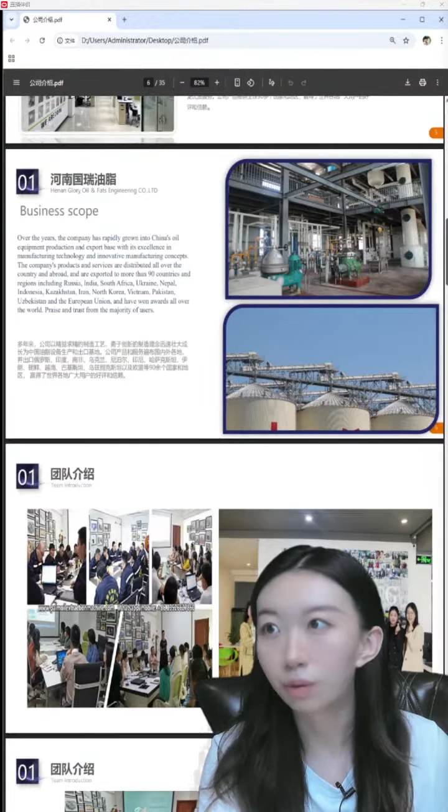Such as extracting edible oil single machine production line, and all process equipment we can provide for you. This is our company office. Our company is located in Henan Province, Central China, and our company has its own factory and its own engineer team. This is our office, and this picture is our previous fully continuous refining process workshop. Our equipment was exported to more than 90 countries and regions.

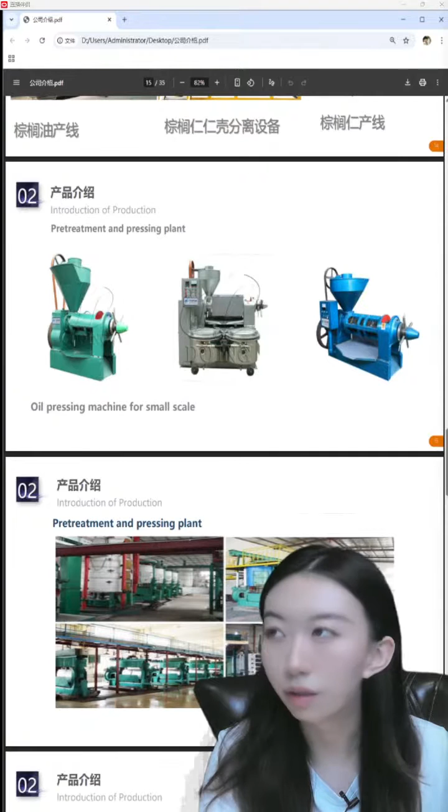The next is the palm kernel oil production line and the palm kernel and shell separator machine. The next is the common oil seeds presser. We have 3 kinds of presser for you, and we can help you choose according to your need, according to your capacity.

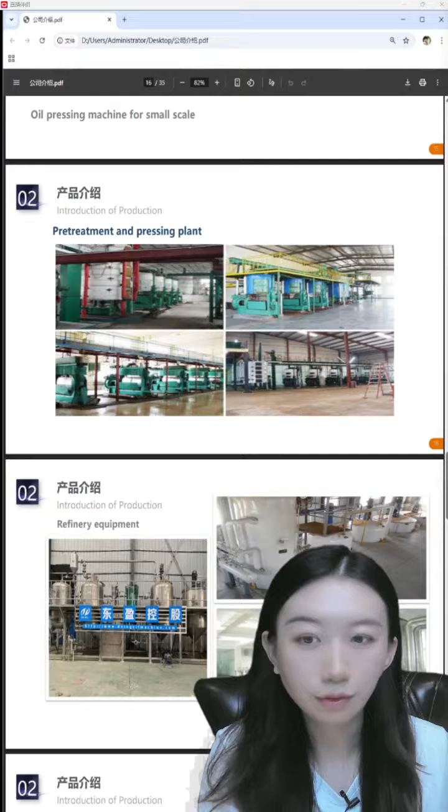Our company has its own factory, its own engineer team, and we can support customization for you. Our engineer can design the production line, the machine plan for you according to your need. This picture is a pre-treatment and pressing workshop. This picture is our previous project.

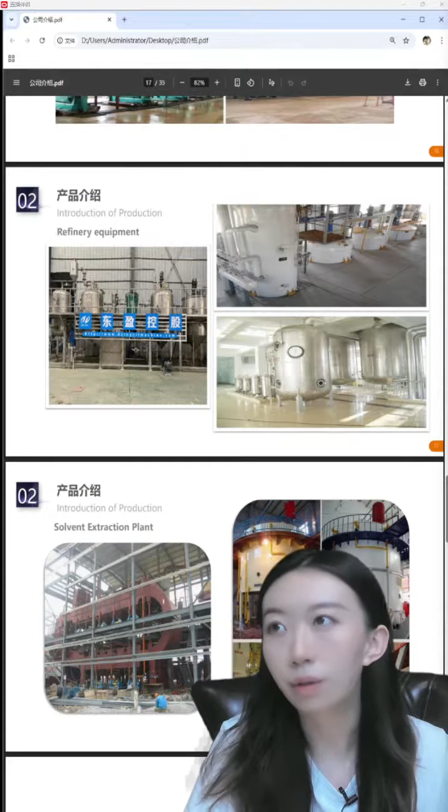The next part is the refinery equipment. We also have 3 kinds of refinery equipment, such as batch type refining production line. This picture is a batch type, and if you want a larger capacity, we also have a semi-continuous refining production line and fully continuous refining production line. It has different capacity, and the higher degree of automation.

The next is a solvent extraction plant. This is a single machine. And besides the single machine, if you need a production line, we can also provide it for you. So guys, if you want to invest in an edible oil production line, or if you want a single machine, all of this equipment you can enter our live show, and our company can provide it for you.

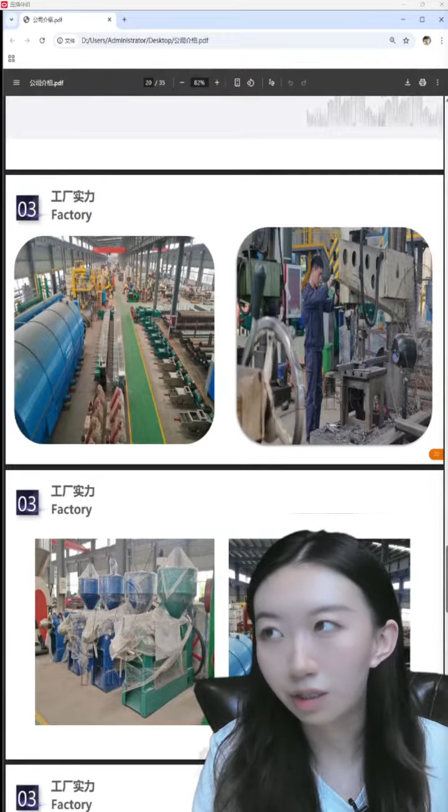This part, next picture is our factory. Our factory covers an area of 40,000 square meters.

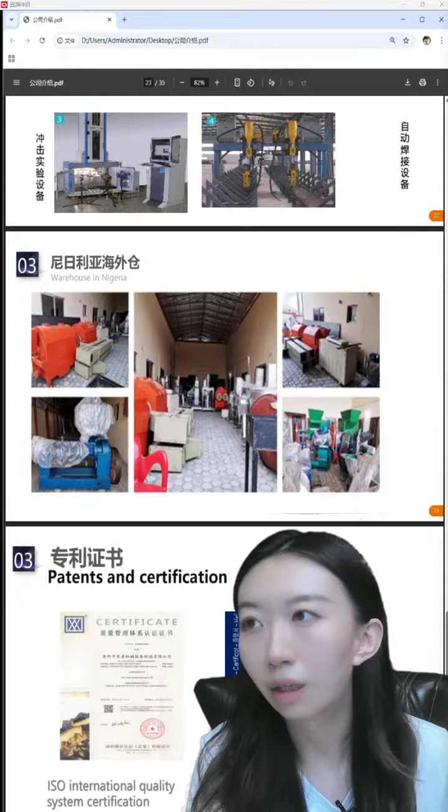And our company also has an overseas warehouse in Nigeria. This is our warehouse, and our company has a subsidiary in Nigeria. So if you are interested in our previous project in Nigeria, in Africa, we can arrange the right sales manager for you to lead you to visit and communicate about our previous project.

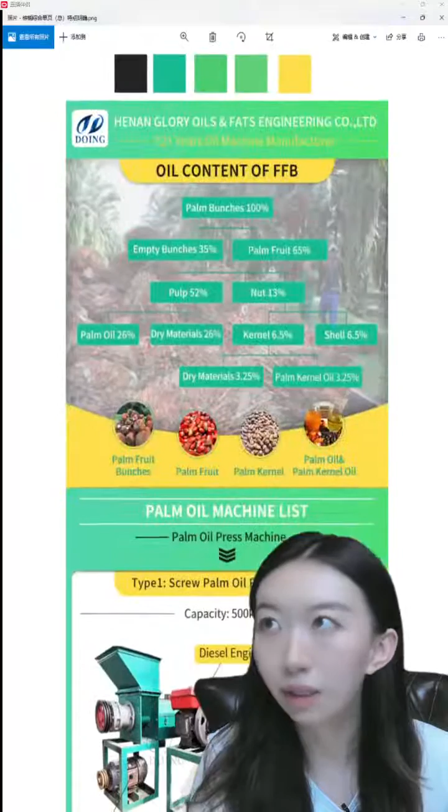Today our topic is to introduce automation and high-yield modern palm oil production equipment for you. So next, let me show you the equipment, let me see the picture.

In palm oil machines, the most important is the presser, and our company has 2 kinds of palm oil presser. The first kind is a single screw palm oil presser. Look at this, and this presser has 2 power systems: diesel engine and electric system. You can choose the suitable system for you, and our sales manager can help you choose according to your need.

The single screw palm oil presser capacity is 500 kg per hour. It is suitable for home use and small investors, palm oil production business starters, because its capacity is smaller.

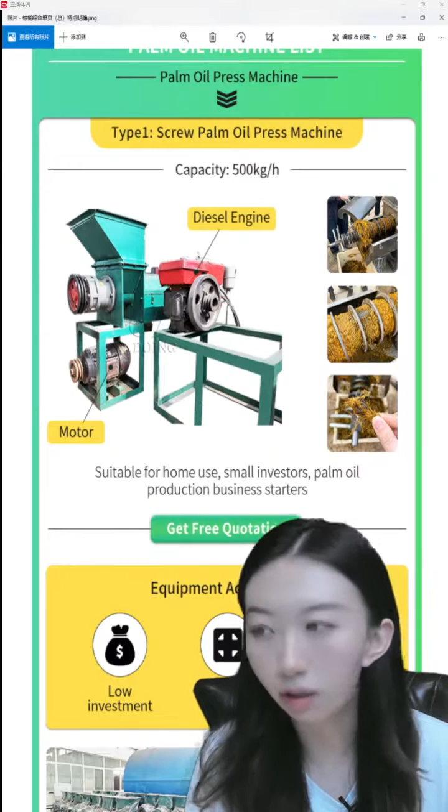And if you want to adjust the internal pressure, it needs a worker. So this equipment is semi-automation equipment. But this equipment is cheaper than the next one. The single screw palm oil presser's advantage is low investment, it's cheap, it covers a small area, and it is easy to operate.

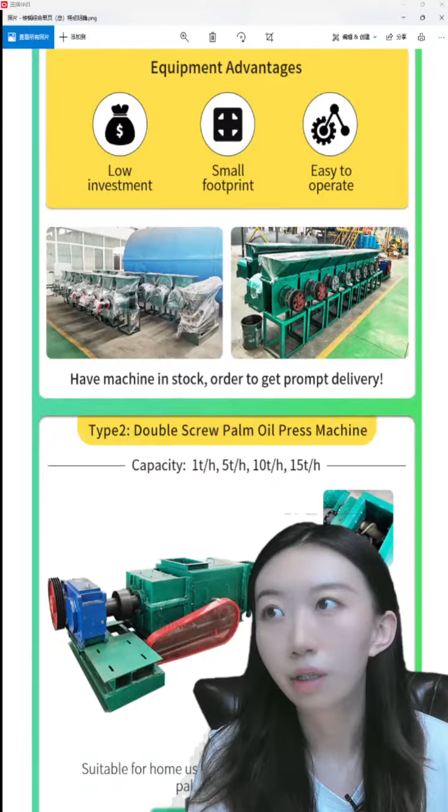It's a simple equipment. And next is the other one: the double screw palm oil presser. This presser has 2 screws, and its residual oil rate is lower than the first.

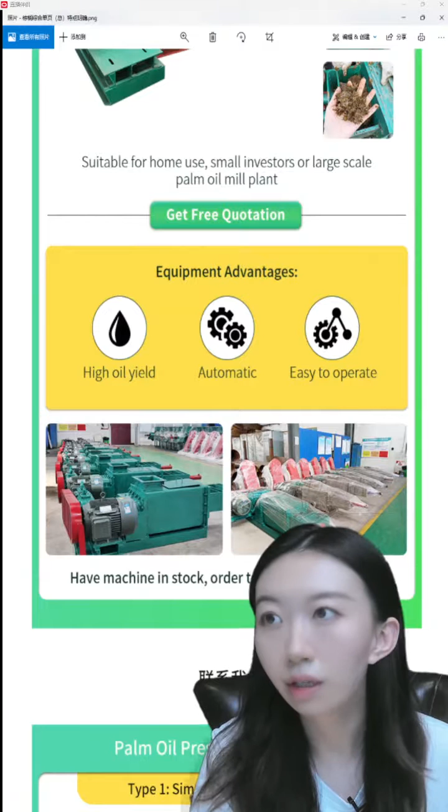Its capacity is more than 1 ton per hour. And this double screw presser is also suitable for production lines. Its capacity is larger, and the internal pressure doesn't need a worker, because this equipment's internal pressure is controlled by a hydraulic pump station and the reducer at the tail. So it's automated, doesn't need a worker. It can decrease labor cost, and it can give you high oil yield, high degree of automation, and it's also easy to operate.

Okay. In the past, I introduced the 2 kinds of presser for you. And guys, if you want a single machine, or if you want a palm oil presser, we can provide it for you. And these 2 kinds of presser, we have machines in stock, and we can arrange prompt delivery for you. We can quickly transport it for you.

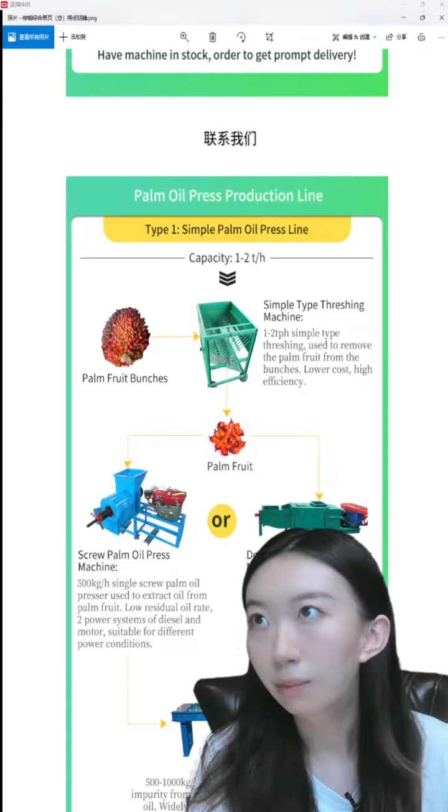Welcome. In the past, I introduced the single machines. Thank you. The single machines are the single screw palm oil presser, and the next one is the double screw palm oil presser. They are palm oil pressers for you. If you want a single machine, we can provide it for you.

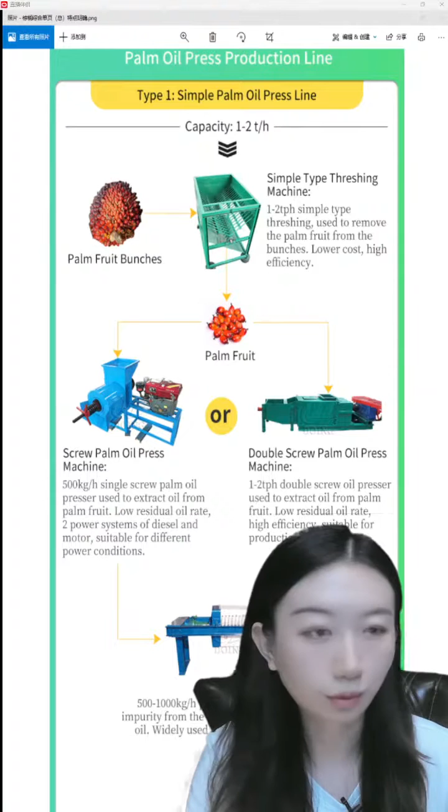After threshing, you can get the empty palm fruit bunches and the palm fruit. Then the palm fruit can enter the presser.

For the presser, we have two kinds. The first one is the single screw palm oil presser machine. Its capacity is 300 kilogram per hour to 500 kilogram per hour. Its advantage is low investment, and it has two power systems.

You can choose yourself the suitable system, and it is suitable for different needs. It can give you a low residual oil rate. But if you want to adjust the internal pressure of this single screw palm oil presser, you need a worker to adjust it.

But the other one, the double screw palm oil presser, doesn't need a worker. It has a higher degree of automation than the single presser, and the double screw palm oil presser capacity is higher. Its capacity is 1 to 2 tons per hour, and it's suitable for production lines.

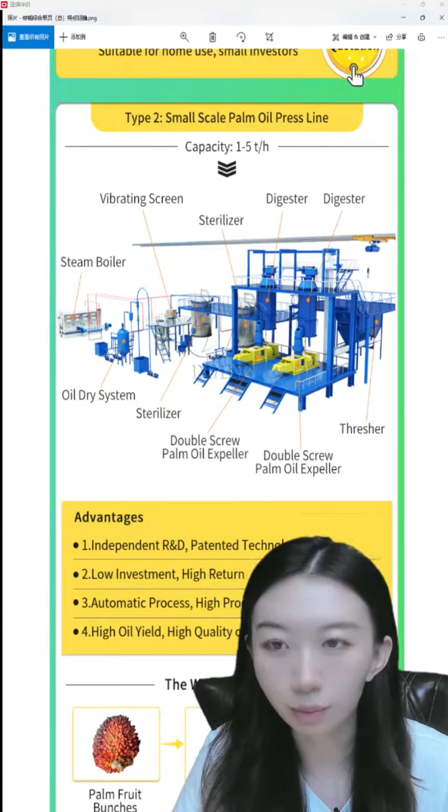This small-scale palm oil presser includes all the process equipment, and this process line has the advantage of lower investment, and it can give you higher returns.

This process line can be designed with fully automatic equipment. The efficiency is higher than the last one. And after this production line, you can get a high oil yield, and high quality crude palm oil.

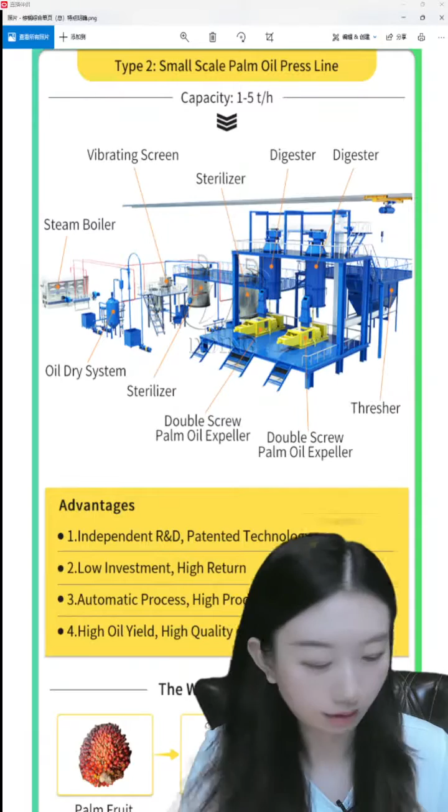The palm oil work process is divided into these steps. The first is sterilization. The FFB will enter the tank to heat and soften the fruit, making it easier to thresh. Next, the palm fruit bunches will enter the thresher to remove the palm fruit.

Next, the palm fruit will enter the digester to destroy the structure of the palm fruit. Next, the palm fruit will enter the presser for extracting the oil from the palm fruit. Then we will get the crude palm oil.

The crude palm oil has many impurities inside, so it needs clarification. This clarification step uses two equipment.

After clarification, the palm oil will enter the filter to remove the small impurities. After this step, you will get the red palm oil, which is the palm crude oil.

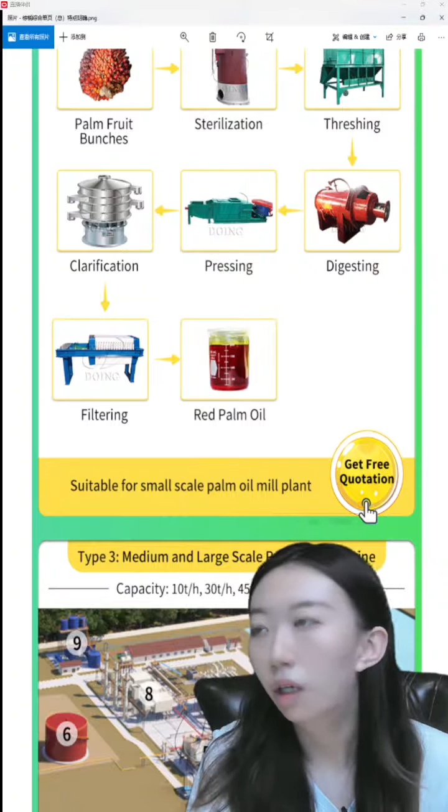And if you want the crude oil to be able to storage for a longer time, you can also equip a vacuum dryer after the filter. It will make the palm crude oil storage time longer.

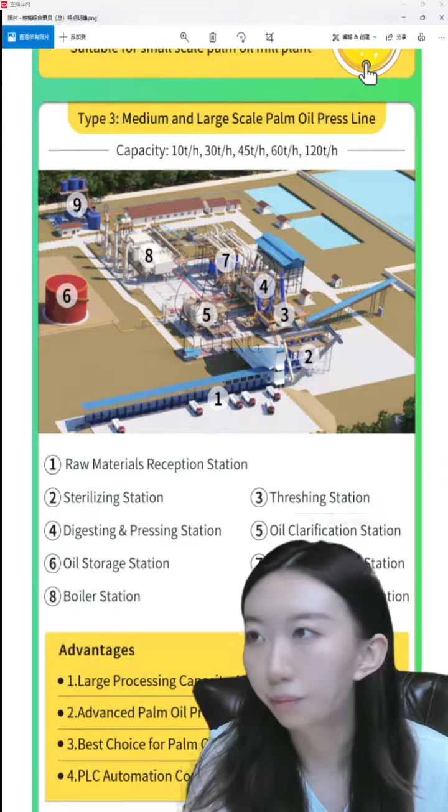In this press line, it will equip more equipment, and it has a higher degree of automation. In the workshop, you don't need workers, because this press line uses the PLC automation control system.

You can control the process by computer, so this equipment will decrease the labor cost for you.

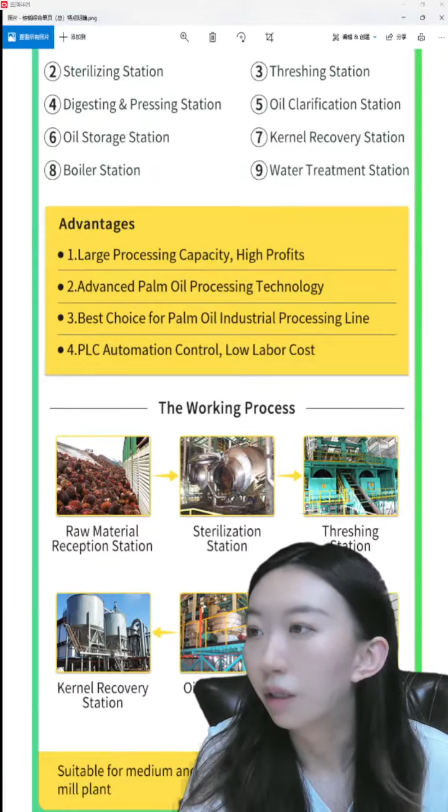This process line has many advantages. It will give you high profits, and it has a large capacity.

After this press line, the crude oil quality is higher than the last press line. The quality and the storage time of the crude oil will be increased.

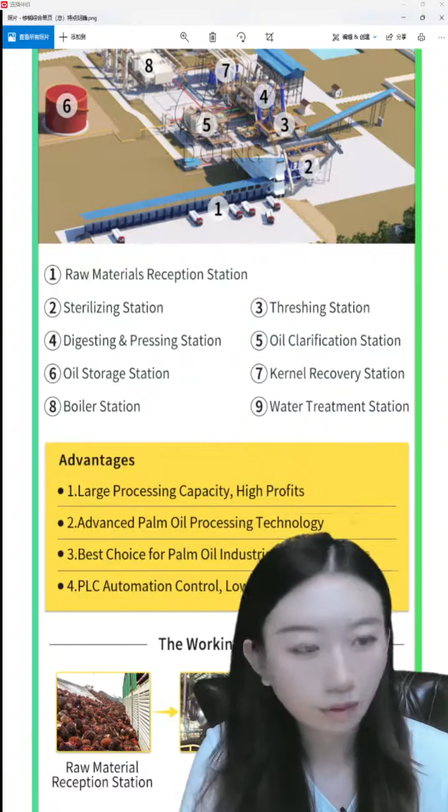This palm oil process line work process is divided into these steps. First, the FFB will park at the raw material reception station, and then the raw material will enter the sterilization station to heat and make the palm fruit soften.

Next, the palm fruit bunches will enter the threshing station to remove the palm fruit. After this step, you will get the palm fruit, and it will enter the digesting and pressing station to destroy the structure of the palm fruit and extract the oil.

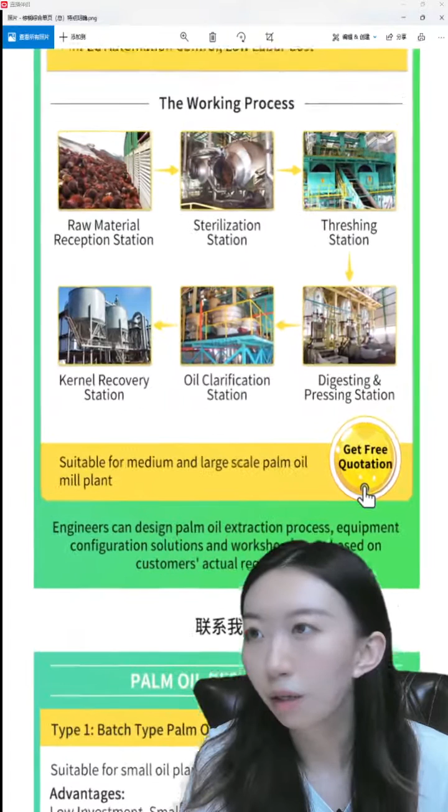Then we will get the crude palm oil, and the crude palm oil will enter the oil clarification station to remove the impurities inside. In the medium and large process line, it will also equip the kernel recovery station.

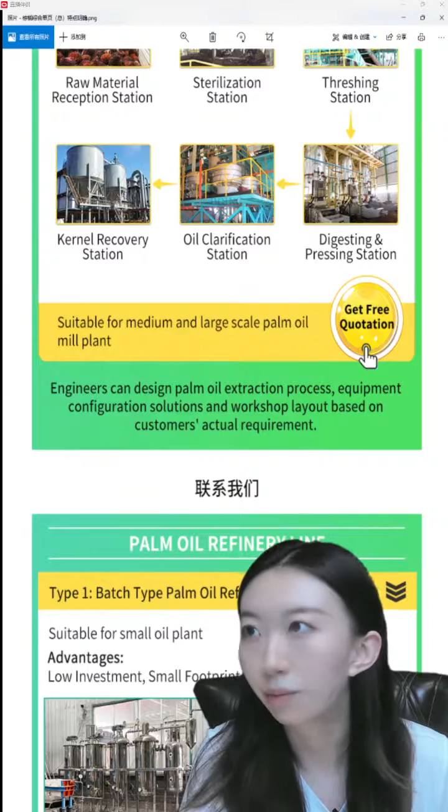And if you want to use the process line more completely, you can also equip a palm kernel process line to produce palm kernel oil, and then you will get more profits. This medium and large palm oil process line is suitable for medium and large scale palm oil mill plants.

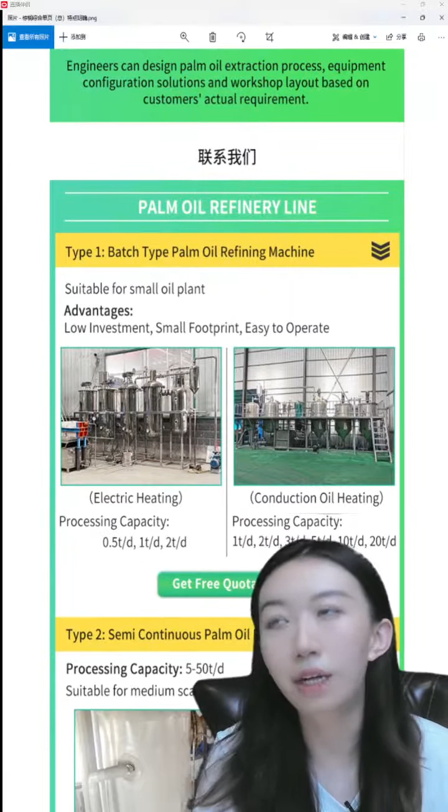Next is the palm oil refining equipment. Let me tell you about it. In this process, we also have three kinds of production lines. The first type is the batch type palm oil refining machine.

This kind of equipment is suitable for small oil plants because its capacity is less than 20 tons per day. This kind of refining machine may have two kinds of heating systems. You can choose according to need.

The first is electric heating. Its capacity is 0.5 tons per day to 2 tons per day. This equipment is cheaper than the other one, but the process cost is higher because it uses electric heating, and it needs higher electric stability. The other one is conduction oil heating.

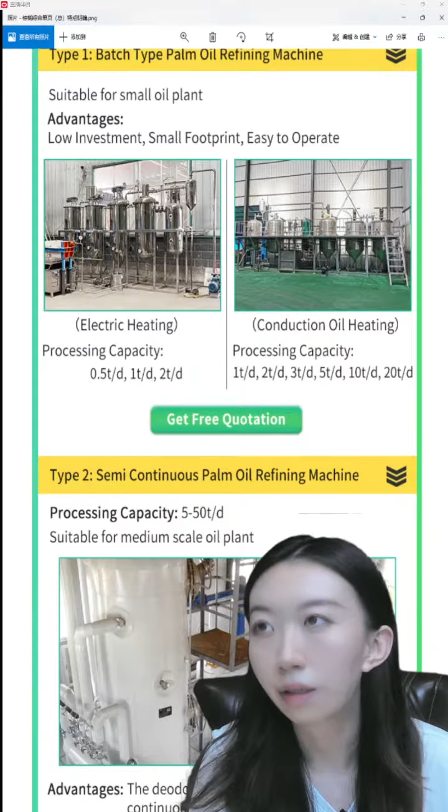Its capacity is larger, 1 ton per day to 20 tons per day. This batch type palm oil refining machine can increase the automation level for you, and this production line doesn't need many workers. Just 3 to 4 members can control this production line.

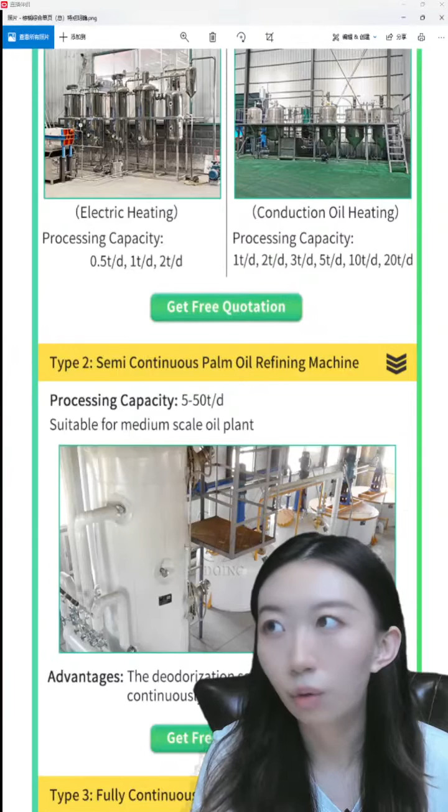Don't worry about it. And if you want to get larger capacity, we can provide the semi-continuous palm oil refining machine for you. The capacity is 5 tons to 50 tons per day, so it is suitable for medium scale oil plants.

Its advantage is it is carried out continuously. Its efficiency is higher, and the quality of refined oil is better, and its automation level is better than the batch type. This picture is our previous project.

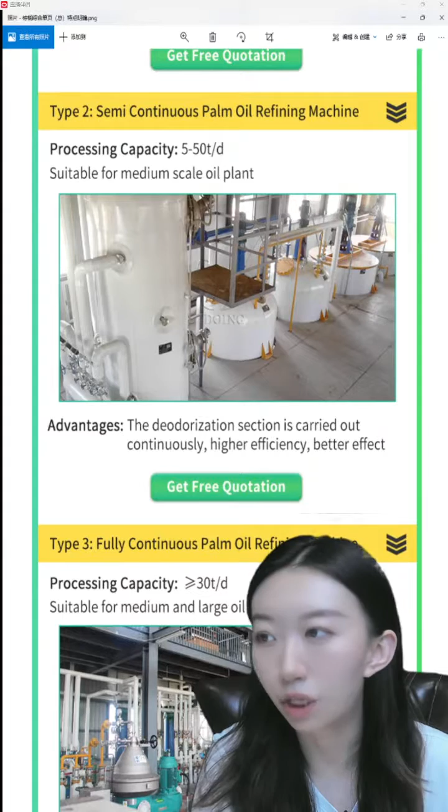Okay, the last refining equipment is the fully continuous palm oil refining machine. Its capacity is the largest, more than 30 tons per day. If you want to invest in a large scale production line, we can provide the fully continuous palm oil refining machine for you. It is suitable for medium and large oil plants.

This fully continuous production line has many advantages because the whole oil refining process is fully continuous. So its automation degree will be increased, and the labor cost will be lower than the other two, and the oil waste will be lower, so it can decrease the residual oil rate.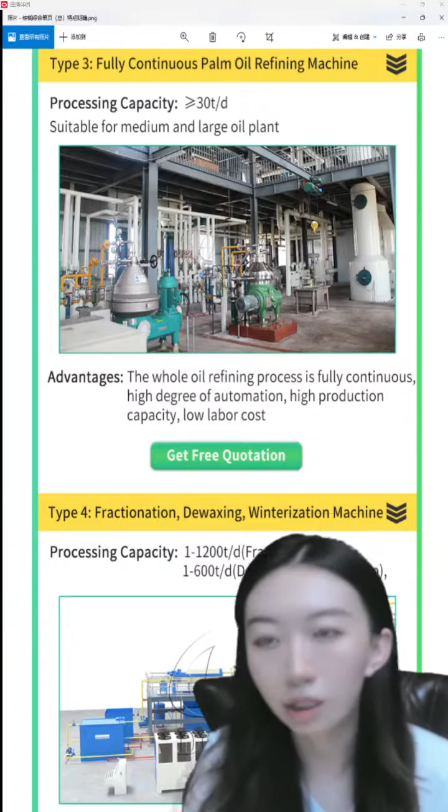Besides the refining equipment and the pressing equipment, we also can provide the fractionation equipment, dewaxing equipment, and winterization equipment for you. The fractionation equipment is suitable for palm oil, palm kernel oil, and coconut oil. The dewaxing machine is suitable for sunflower oil, corn germ oil, rice bran oil, and flaxseed oil. The winterization machine is suitable for cottonseed oil.

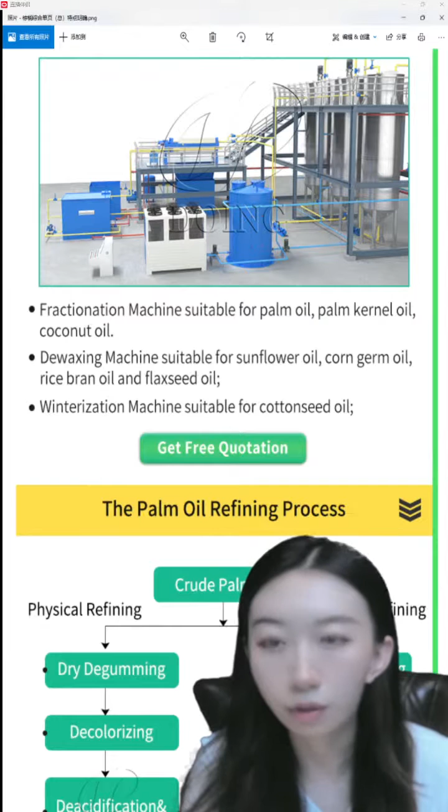This part is the refining process, and different kinds of oil seeds are suitable for different processes, and we can choose the suitable method for you.

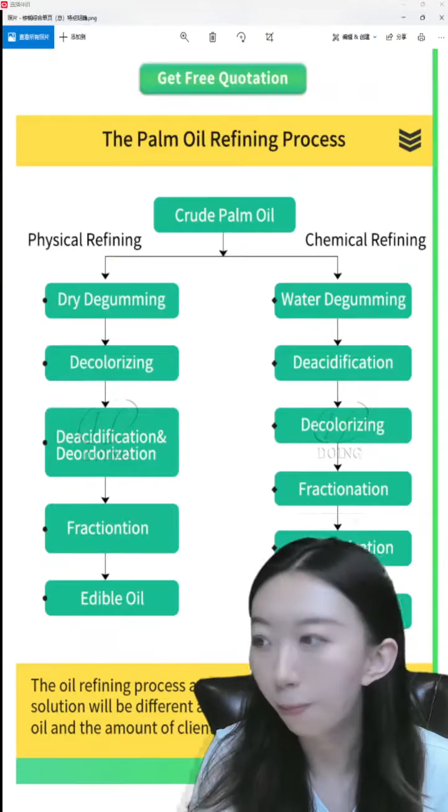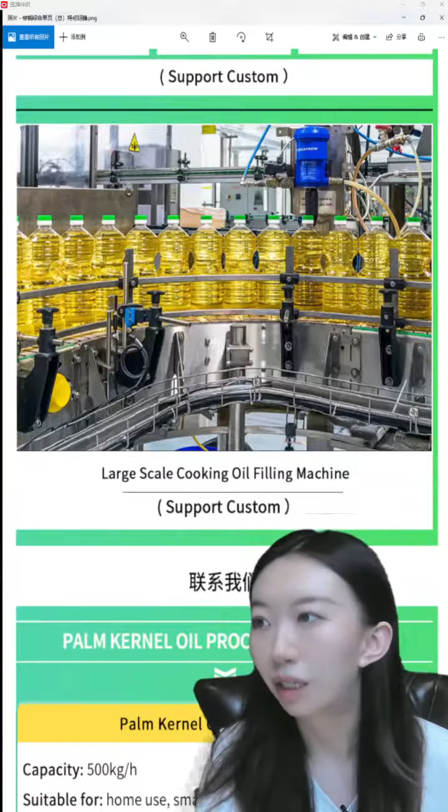Okay, next let us see the 3D video to know the palm oil press line, and I will introduce the palm oil pressing process for you.

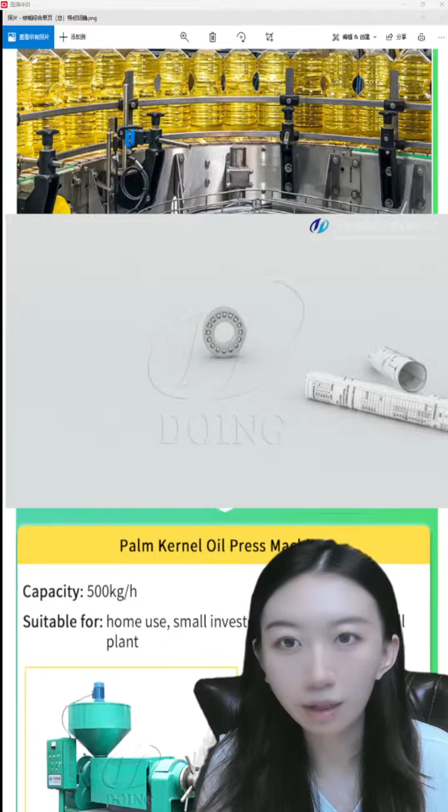Now I'm using this 3D video to show the 1 to 2 ton palm oil press production line. The palm oil press line is divided into several steps: sterilization, threshing, digesting, pressing, and clarification, and vacuum drying.

These steps constitute the palm oil production line.

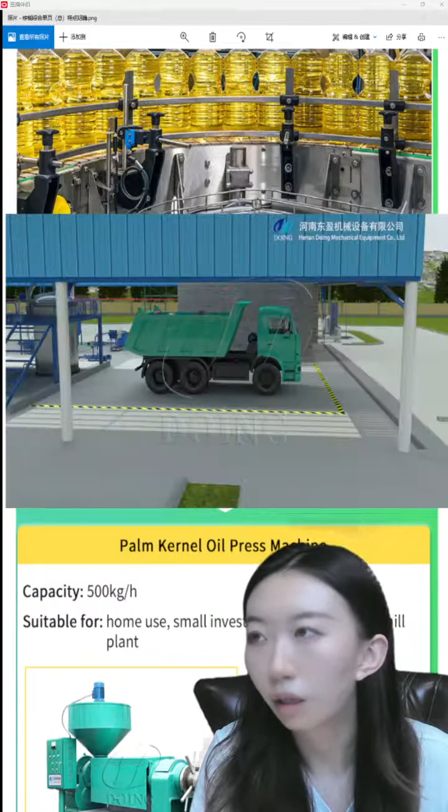And the first step, the truck will unload the FFB on the ground, and then the worker loads the FFB into the fruit cage.

In this production line, we also equip a crane. The crane lifts the fruit cage and puts it into the sterilizer. This is the fruit cage, and 4 fruit cages can be put in each sterilizer.

And the door of the sterilizer is a hydraulic door, opening and closing to meet the worker's needs.

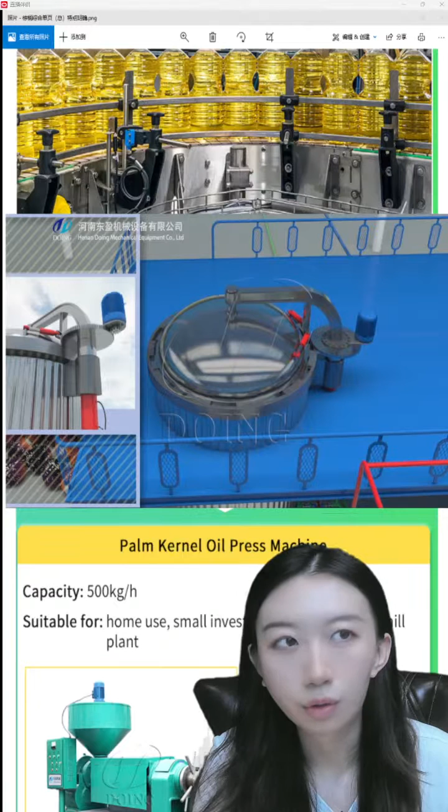And then the FFB will stay inside for heating. It will heat for 1 hour to 90 minutes.

And this room is a boiler room. This boiler is a biomass boiler. It burns empty palm fruit bunches, or branches, or firewoods.

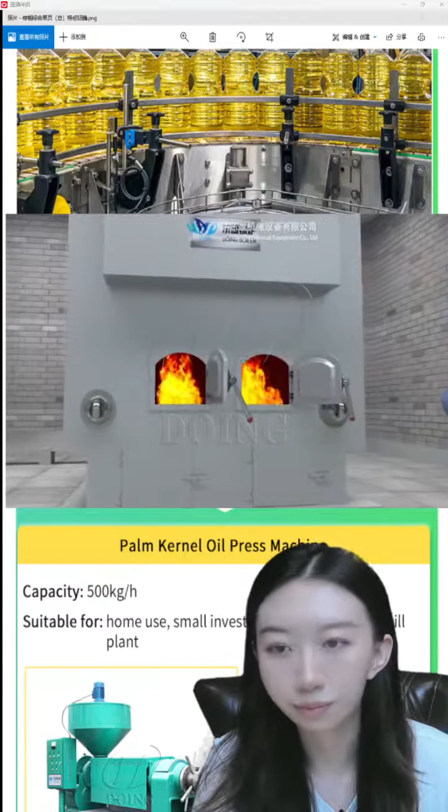And after boiling, the steam will enter the steam drum and then lead to different step equipment. Because palm oil solidifies easily, every step of equipment has a heating coil.

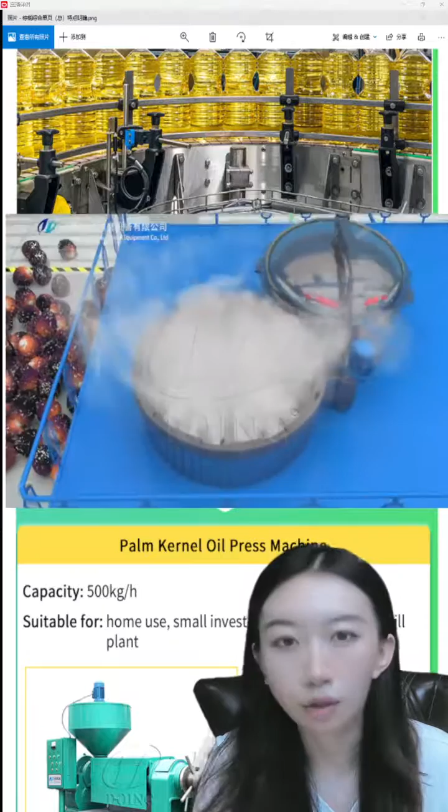And after sterilization, the palm fruit on the palm fruit bunches will be softened and easier to remove the fruit from.

So then the crane lifts the fruit cage and puts it on the shelf. Then the palm fruit bunches will enter the thresher.

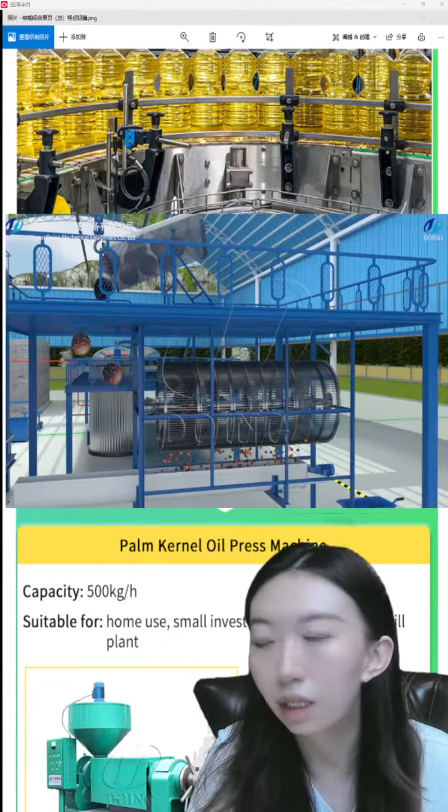This thresher is a drum type palm thresher. It is 2.5 meters long. Because it is long, the palm fruit bunches can stay inside for a long time, and the palm fruit can be removed clearly.

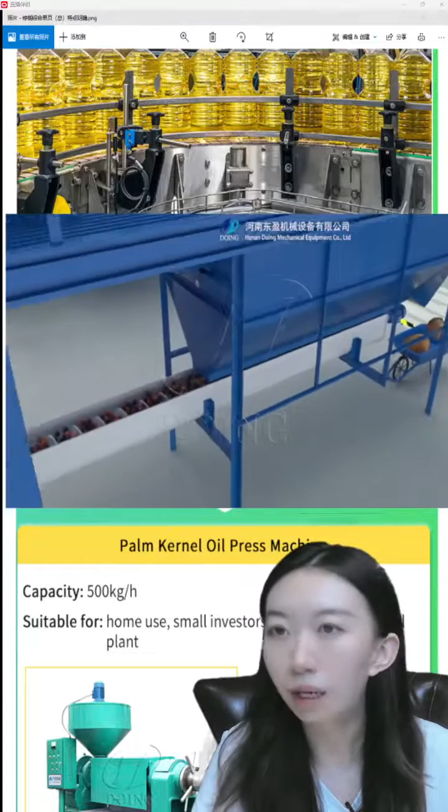And after threshing, the palm fruit will fall down to the screw for the next stage, and the empty palm fruit bunches will fall out from the other side. We prepare a trolley to collect it, and the empty palm fruit bunches can be the fuel for the boiler.

The next stage is digesting. Then the palm fruit will enter the digester through the screw conveyor. This digester is a vertical digester.

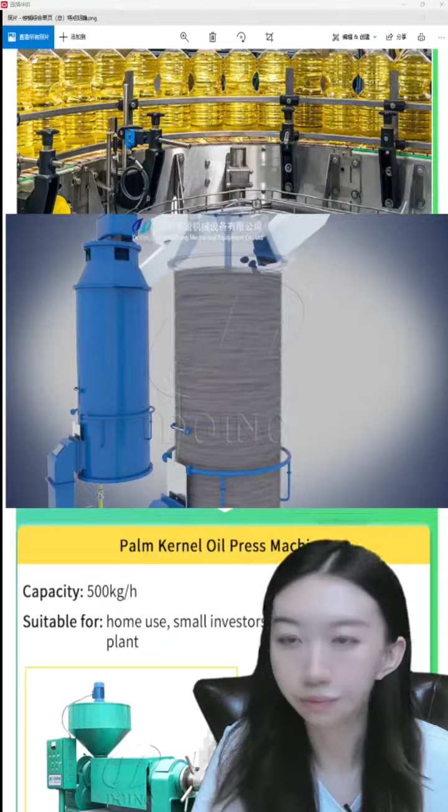And there are many stirring knives. The fruit inside will have its structure destroyed.

And during digesting, some palm crude oil will flow out, and our engineer designed an oil collecting tank in the pipe below.

Next stage is pressing. The palm fruit will enter the double screw palm oil presser directly. In the video, we use a double screw palm oil presser because its residual oil content is lower and its efficiency is higher.

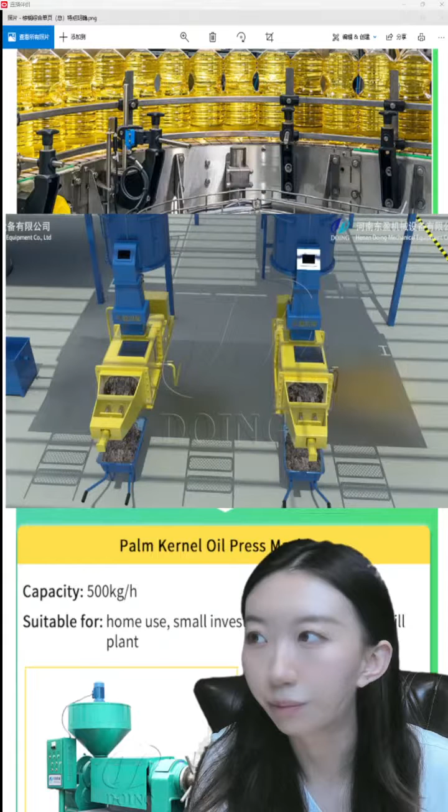There are two screws. The two screws move relative to each other, and the oil will be discharged by beating.

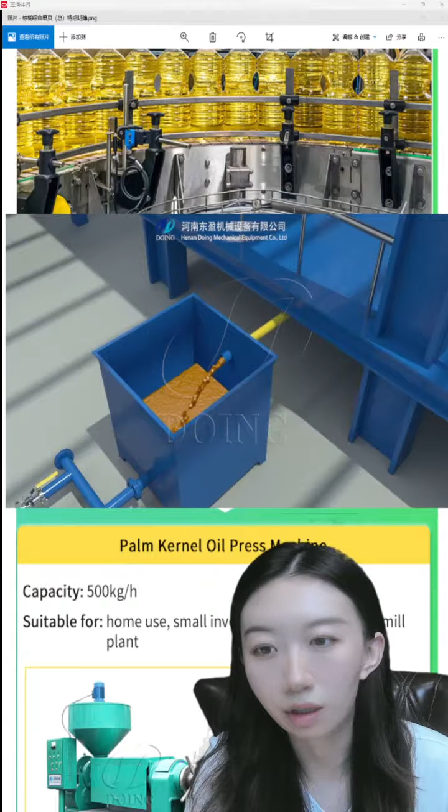This double screw palm oil presser's internal pressure is controlled by the hydraulic pump station, and the residual material exits via the reducer at the tail, so it doesn't need a worker. This double screw palm oil presser can also decrease the labor cost for you.

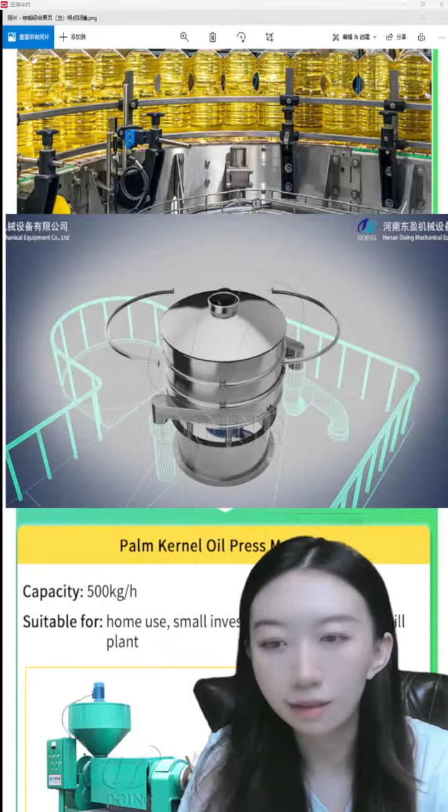So the palm crude oil needs to be filtered, needing many rounds of filtration.

We can see the first equipment is a vibrating screen. There are 3 layers, and the top 2 layers are filter screens. The impurities can be removed to the side by twisting, during which the crude oil passes through.

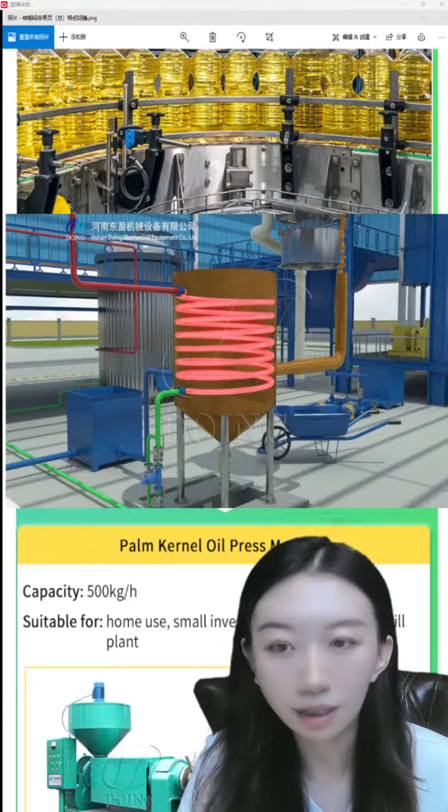And next, the crude oil will enter the clarification tank. This is the clarification tank. The crude oil will enter the middle and lower part of the clarification tank.

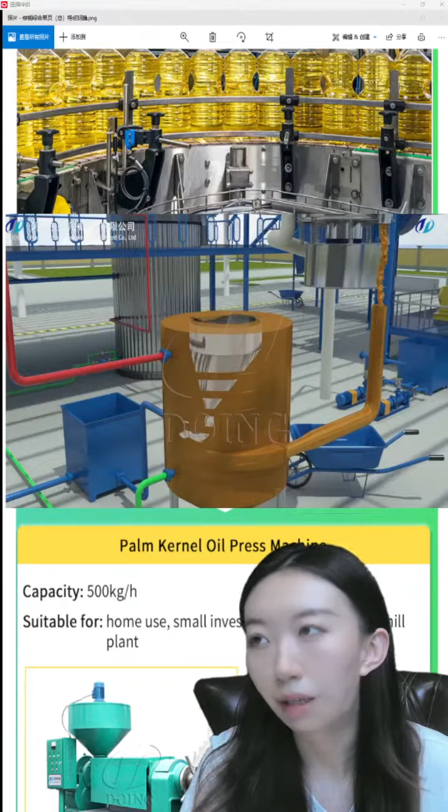And the clarification, the crude oil will settle inside. After settling, the impurities will settle to below, and the lower part is dirty oil while the upper part is clean oil. We design an overflow device on the upper part, so the clean oil will always be taken.

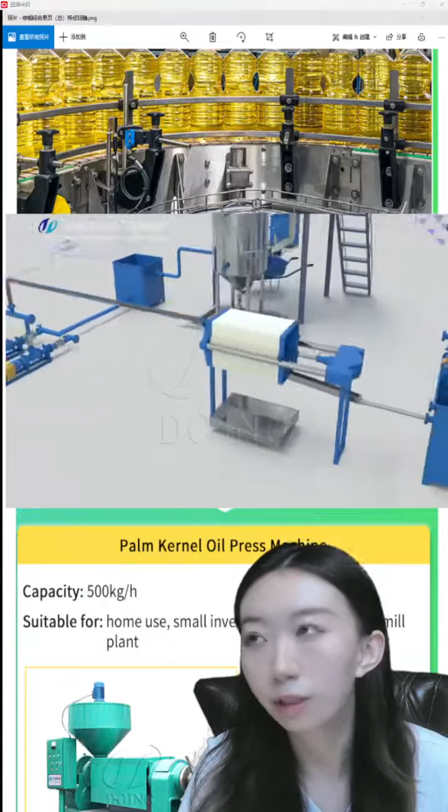Then the clean crude oil will be pumped to the plate filter to remove the small impurities. The plate filter has many filter plates, and each filter plate has a filter cloth, and the clean crude oil will be discharged by squeezing through the side outlet.

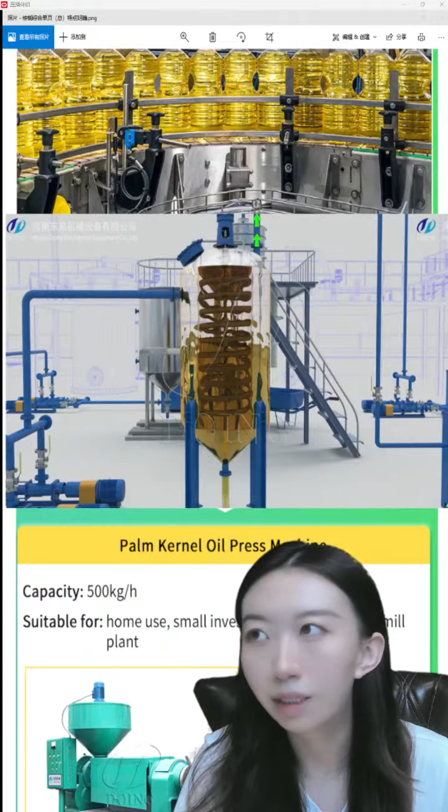Then the last step is the vacuum dryer. After this step, the storage time of the crude oil will be longer. In this step, we use high temperature steam to heat the crude oil and make it boil. During boiling, the internal moisture of the crude oil will rise along with some oil steam, and enter this equipment.

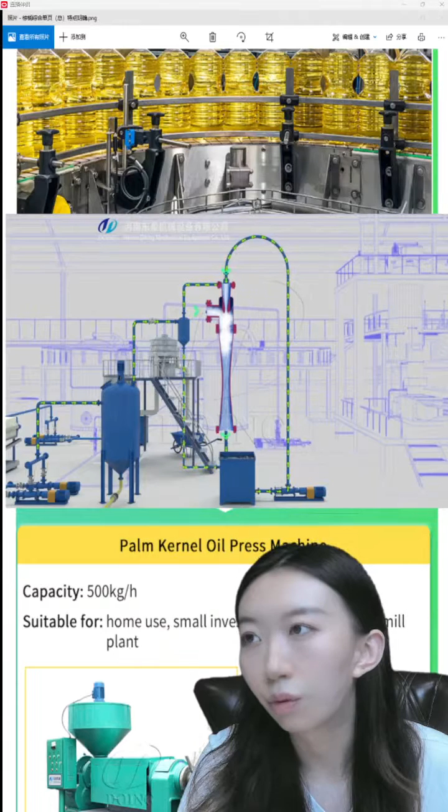This equipment is the oil water separator. In this equipment, the oil steam will fall down and be collected, and the water vapor will continue to the water jet equipment.

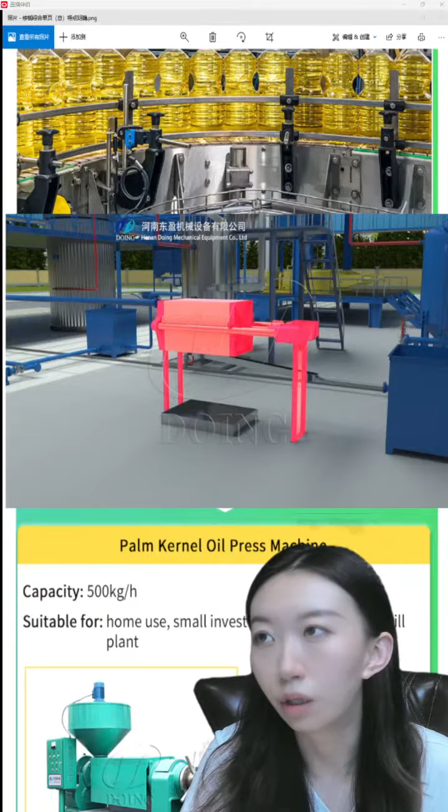After drying, the water content of the crude palm oil will be lower, so its storage time will be longer, and it can be pumped to the oil storage tank for storage.

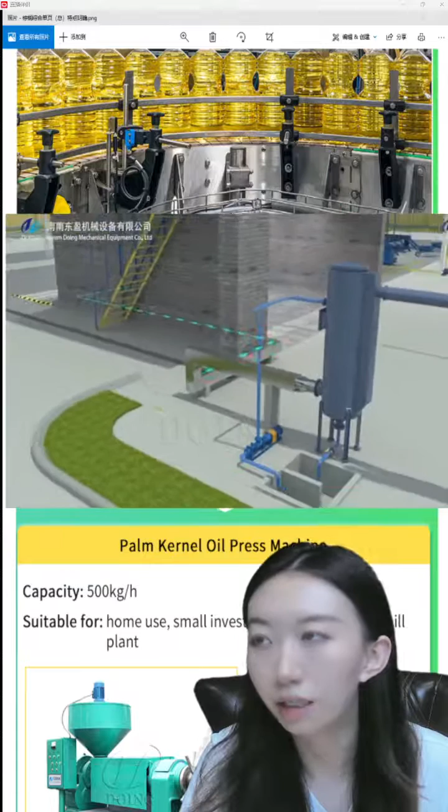This part removes the impurity cake on the plate filter. After producing, the exhaust gas from the boiler needs to be treated. The exhaust gas will enter the water spraying device, and after spraying, the exhaust gas can be discharged.

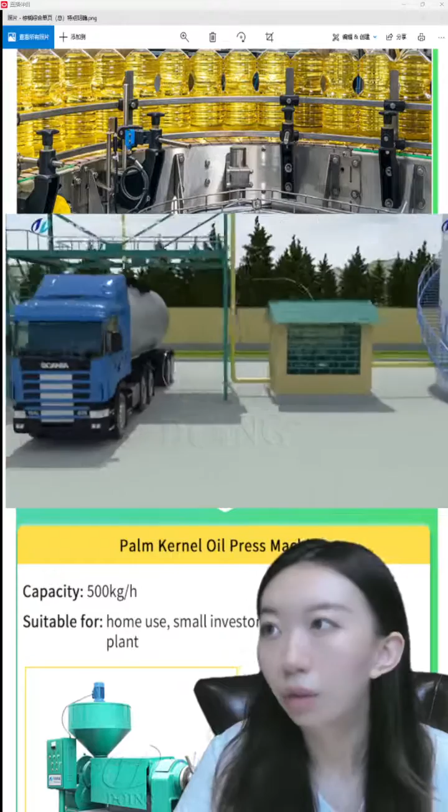The 1 to 2 tons per hour production line has now been introduced.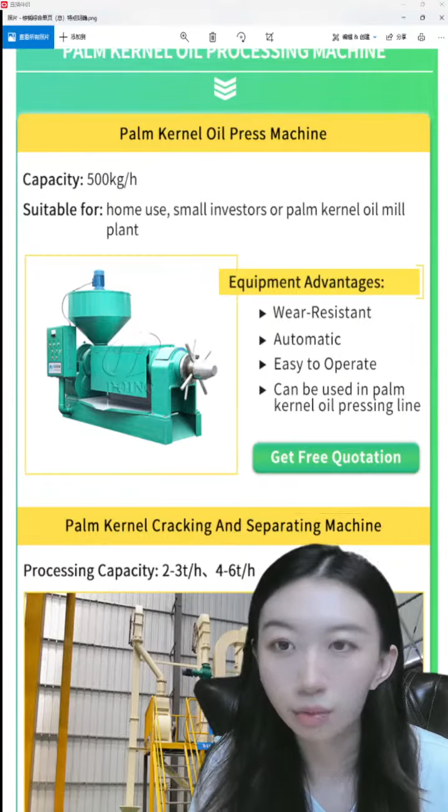Okay, next let's learn about the palm kernel oil processing machine. The first is a palm kernel oil presser. Its capacity is 500 kg per hour and it is suitable for small investment palm kernel oil mill plants. This equipment can be used in the palm kernel oil pressing line. Its advantages include a high degree of automation, easy operation, and the internal screw has good wear resistance, so the equipment lifespan is longer.

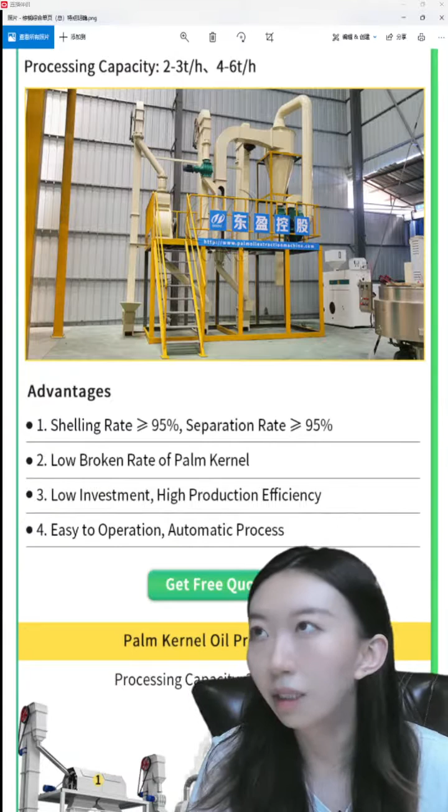Next in the production line is the splitting machine. It can split the palm kernel shell and the palm kernel. Its shelling rate is more than 95%, and the separation rate is also more than 95%, giving better splitting effect. This equipment is cheap and its efficiency is higher. It is also an automatic process, so it doesn't need a worker to control it.

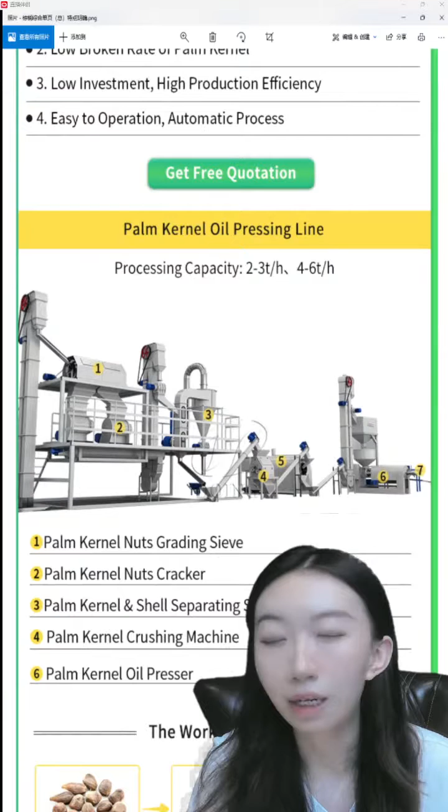Next is the pressing line equipment. This production line includes the palm kernel nuts grading sieve, the cracker, the kernel and shell splitting system, the crushing machine, the cooker, the palm kernel oil presser, and the last one is the plate filter.

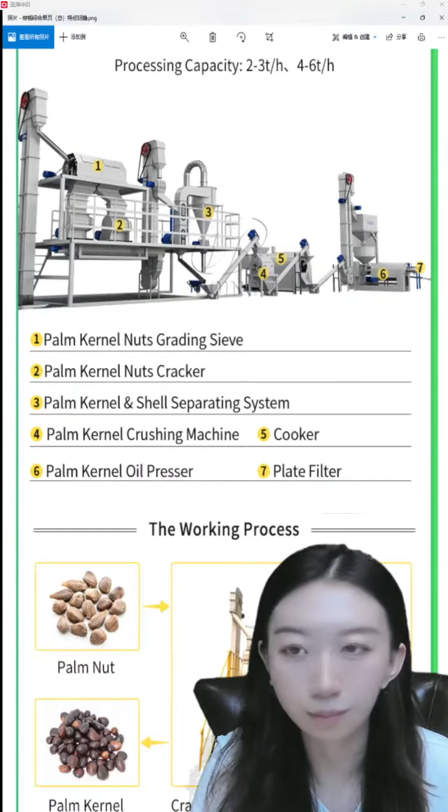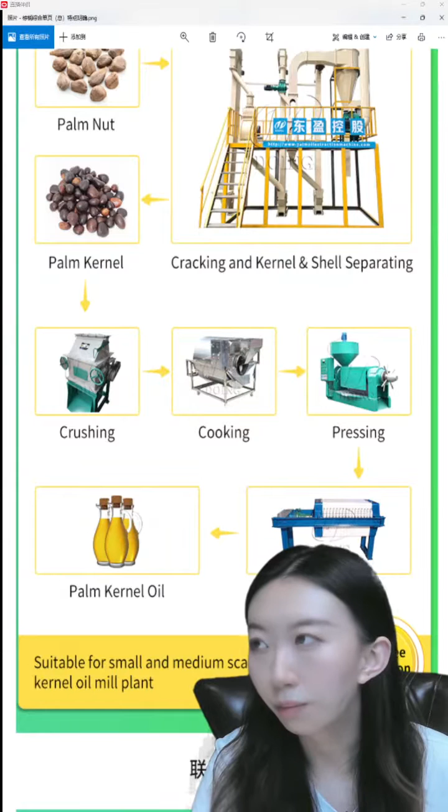This production line process is divided into steps. First, you put the palm nut into the splitting system to split the kernel and shell. After splitting, we get the palm kernel. Because the palm kernel is large, it needs to be crushed, making it easier to adjust the moisture and temperature. Next, the palm kernel enters the cooker to adjust its temperature and moisture. After cooking, the moisture and temperature are standard, so it can enter the presser.

This presser is the palm kernel presser. After pressing, we get the palm kernel crude oil. But the palm kernel oil has some small impurities inside, so it needs to be filtered. This is a plate filter, and it can remove the impurities inside the crude palm kernel oil. After filtering, we get the clean crude palm kernel oil.